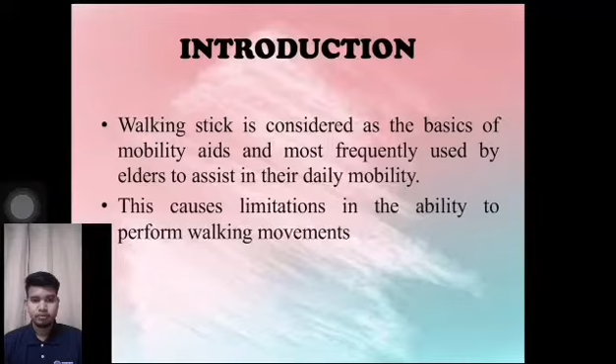For problem statement, we have three. Number one, different environments have limited features that can be used with the walking stick. For example, in Malaysia we face humid and hot weather, so for people using a walking stick, it is inconvenient for them to bring an umbrella everywhere. It can be a burden due to heavy weight.

For the second one, the user may not be able to maximize the use of the walking stick, especially for those who are disabled, because some features in the walking stick have complicated functions.

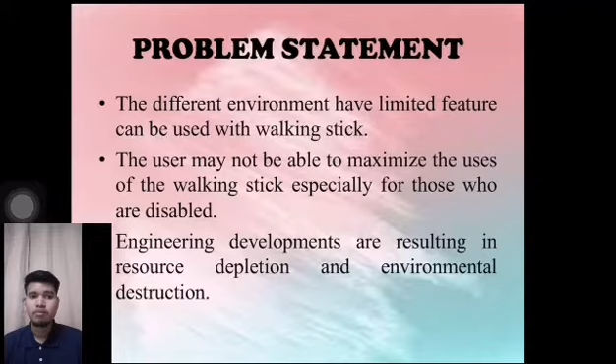For the third one, engineering development is resulting in resource depletion and environmental destruction. This is because nowadays a major issue has risen about environmental safety.

For our objectives, the first one is to innovate the current walking stick with a unique design. We want to design a walking stick that has multi-function usage.

For the second one, to determine the function of the walking stick while working properly, so the user can use the product efficiently and effectively with the multi-function product.

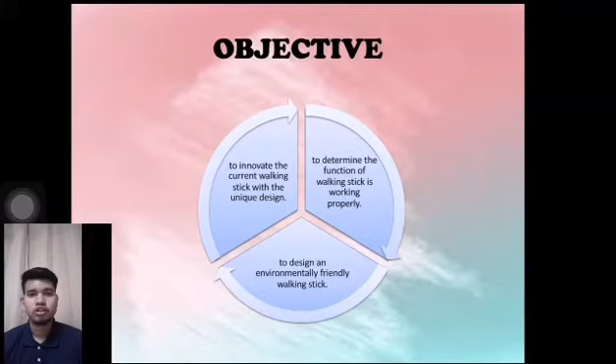The third is to design an environmentally friendly walking stick, so we want to avoid the destruction of the environment which is the current issue.

Assalamualaikum warahmatullahi wabarakatuh. I am Nurin Safia binti Rusli and I am going to explain the literature review and methodology. As we know, external support is needed to increase sensory input and psychological support in physical disabilities while walking. The elderly start using a walking stick because of balance, postural disorders, and to prevent falling.

A walking stick is the most preferred walking aid because it is easy to use and is accepted by society. However, there is a common problem in that walking sticks are not ergonomically designed. Usually, walking sticks designed and developed by medical device manufacturers are not suitable for individuals, but are manufactured considering average senior citizen anthropometric dimensions.

These types of walking sticks are mainly non-adjustable, heavy, and hard to use on any occasion. They also cannot be fully folded. Due to big sizes, these existing products are inconvenient to use in crowded areas and also hard to store. Generally, walking sticks are often built in a traditional way and are not designed considering ergonomic principles.

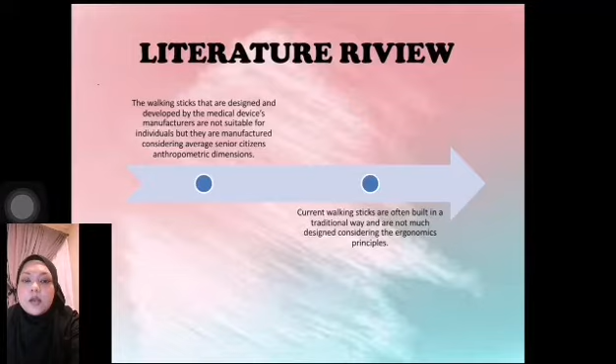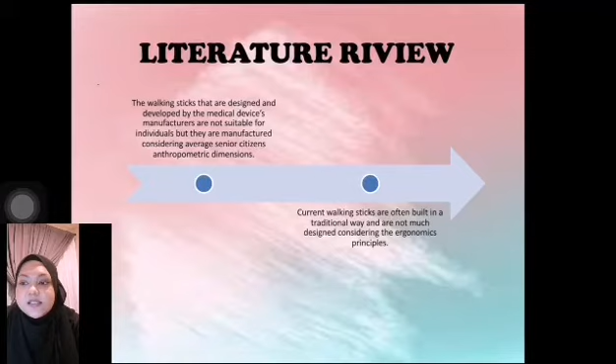After having all the particulars and standards, the morphological chart is obtained using these steps. The first step is to put the choice rules into a table from Task 1 overview since it mirrors the customer request towards the item.

Next, list down a number of plans at the top to allude to. Put the idea parts into the outline to choose later on. Then we have to consolidate all the ideas or thoughts for the item, and the last step is the screening and scoring process.

The screening process is where we evaluate and reduce the number of generated concepts that were taken into account to satisfy the user's needs, by comparing relative advantages and disadvantages of each generated concept and selecting one or more concepts at the end.

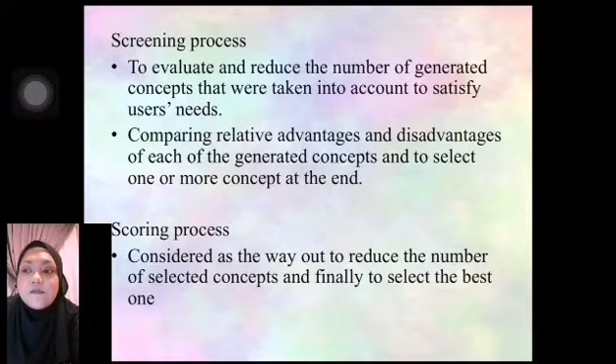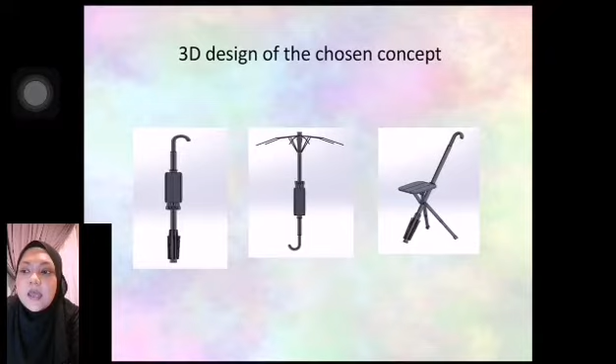For the scoring process, we use it as the way to reduce the number of selected concepts and finally select the best one. After screening and scoring, we obtain the one best concept, and the 3D design of the chosen concept is this.

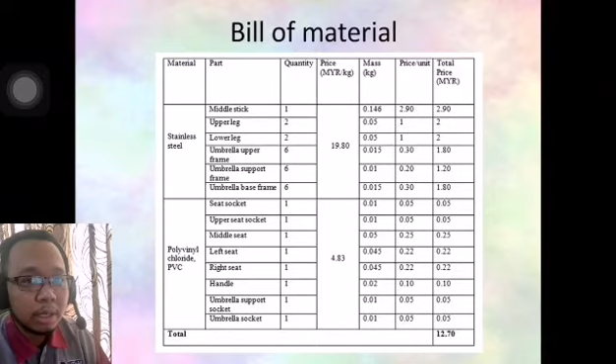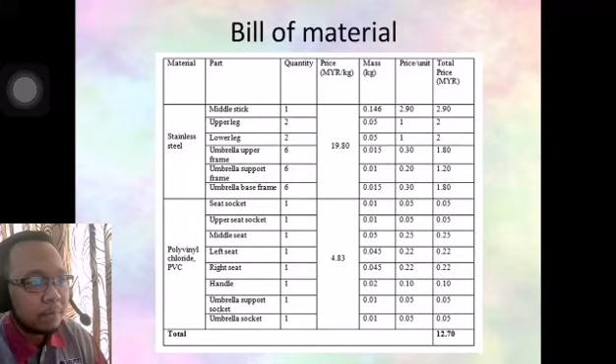For the bill of material, our main materials are stainless steel and PVC. During the project, the price per kg of stainless steel is 19 ringgit 80 cents and PVC is 4 ringgit 83 cents. After multiplying the price, mass, and unit of the part, we get a total price of 12 ringgit 70 cents.

Now for the manufacturing process, we have the middle stick part. The appropriate process for the middle stick is seamless extrusion because of the shape of the middle stick.

With seamless extrusion, we can get a seamless hollow pipe shape. After that, we have middle seat, left seat, and right seat. The appropriate process for this part is injection molding, and then fabrication to get a more refined finishing product. Same with the upper seat socket, umbrella socket, seat socket, and handle.

After that, we have upper leg and lower leg. These two products are made of wrought stainless steel. So the appropriate process is extrusion and then fabrication to get a more refined finishing product.

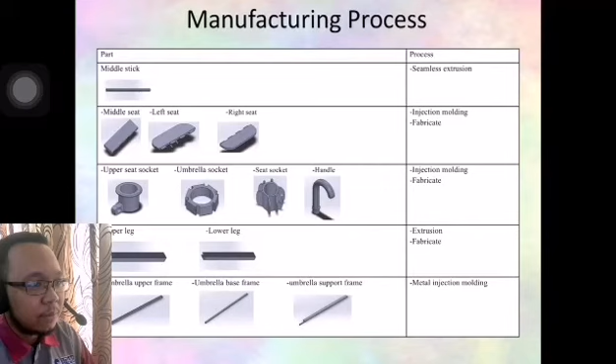Finally, we have umbrella upper frame, umbrella base frame, and umbrella support frame. These three products have a complex shape, so the best process for these three parts is to use metal injection molding to get the complex shapes of the product. That's all from me. Thank you.

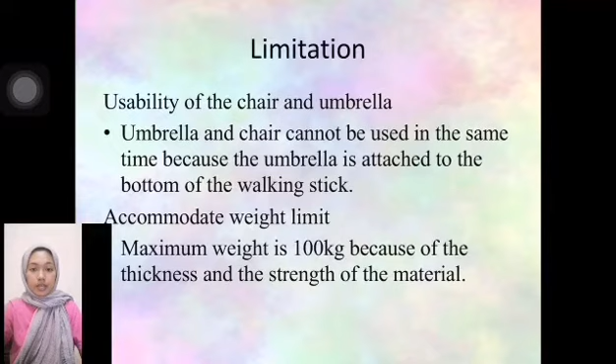Next, I will explain the challenges faced while completing the project. First, we had trouble distributing the questionnaire because this product is specifically made for the elderly and those suffering from walking disability. Most of them do not use smartphones to answer the questionnaire in Google Form, so we had to meet them personally.

Next, the unstable and limited coverage accessibility led to difficulty in searching for information and completing the project. Lastly, students had trouble and limited access to related sources because of the pandemic, as all libraries were closed, which limited our ability to find information about the walking stick. Next, I will explain the estimated cost for one walking stick.

The raw material cost is RM12.70 as shown in the bill of materials. The manufacturing cost is RM50. It is quite expensive because it includes the cost to make the stick, seat and umbrella, and the cost to connect all parts into one walking stick with chair.

The transportation cost is RM5 for one walking stick, to deliver the item to the buyer. The total estimated cost, which is RM67.70, is for the direct buyer. The price will increase according to market value.

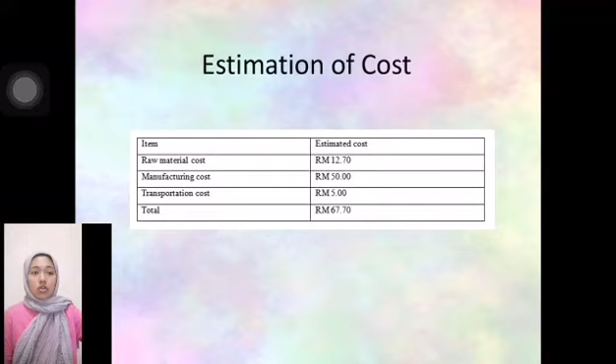I will present part of the discussion. The walking stick chair with umbrella is an idea derived from an existing product, improved based on customer feedback. The umbrella is another function provided at the walking stick, which is the new idea.

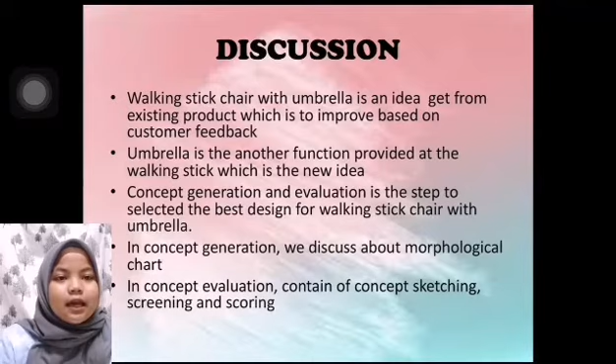Concept generation and concept evaluation are the steps to select the best design for the walking stick chair with umbrella. In concept generation, we discuss the morphological chart. In concept evaluation, we cover concept sketching, screening, and scoring. Firstly, let's look at concept generation.

This figure shows the morphological chart. At that point, we arrange our discoveries or examination into the diagram. This diagram comprises our choice of measures and 5 choices of design plans. This outline is essentially founded on functional examination of our item.

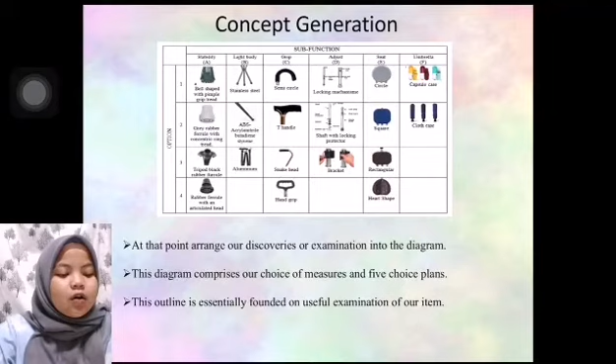Next is concept evaluation. There are 5 concepts obtained from the morphological chart. Concept 1 has a bell shape with pimple grip tread, body of stainless steel, semi-circle hand grip, locking mechanism for adjustment, circle seat, and capsule case for umbrella.

Concept 2 has a tripod black rubber ferrule, body of ABS, hand grip shape, bracket for adjustment, rectangular shape, and cloth case for umbrella.

Concept 3 has a grey rubber ferrule with concentric ring tread, body of ABS, T-handle shape, locking mechanism for adjustment, rectangular shape, and cloth case for umbrella.

Concept 4 has a rubber ferrule with an articulated head, body of aluminium, semi-circle shape, bracket for adjustment, rectangular shape, and cloth case for umbrella. And lastly, concept 5.

Concept 5 has a bell shape with pimple grip tread, body of stainless steel, T-handle shape, bracket for adjustment, rectangular shape, and cloth case for umbrella.

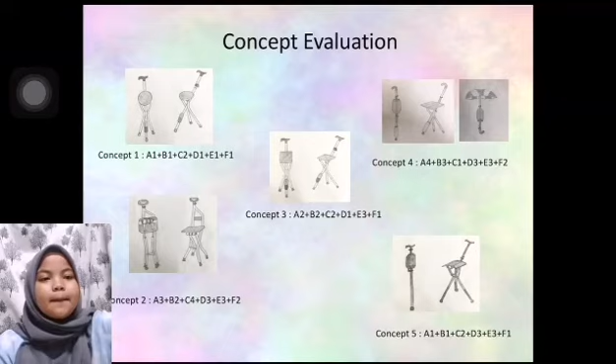Based on customer needs, which is translated into the morphological chart, 5 concepts were decided for the design of the walking stick chair with umbrella. Selection criteria were selected from the customer, obtained from the questionnaire we built to know what the customer needs from our product.

Concept 6 is our datum, shown in the concept screening table. As a result, there are 3 concepts selected from the screening method: concept 2, concept 4, and concept 5. Concept 5 has the highest ranking other than the datum because most criteria are better than or equal to the datum. Concept 4 and concept 2 have the same net score because some criteria are better or worse than the datum.

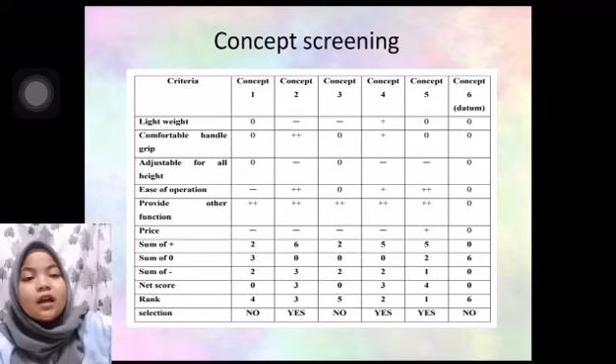After the concept screening, we needed to score all 3 selected concepts. Concept scoring uses a numerical score on a simple scale relative to a benchmark. The weight percentage is obtained from the house of quality, based on the importance of customer needs.

Although we changed the value a little, because we looked at the major criteria customers need from our product, the rating of each selection criterion is based on the previous method, which is concept screening. The two figures show the concept scoring. Concept 4 is selected from the scoring method based on the rating of each selection criterion from the previous concept screening method.

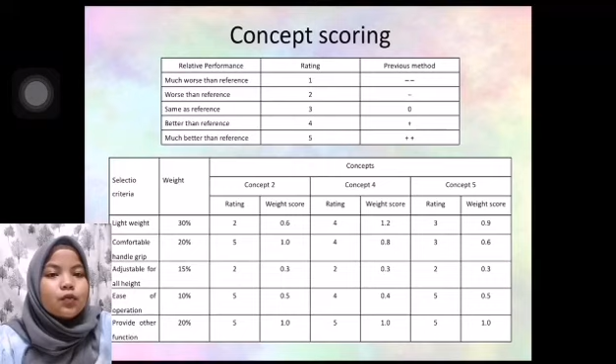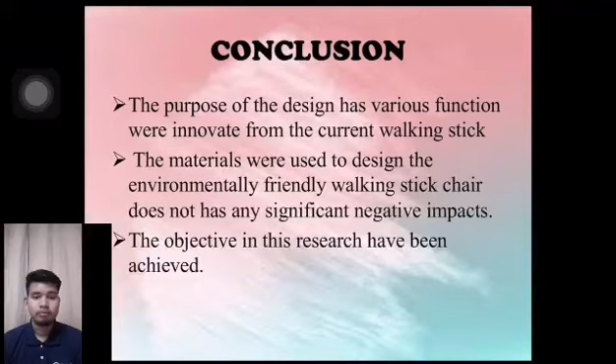For the conclusion, the purpose of the design with various functions was innovated from the current walking stick. The materials used to design the environmentally friendly walking stick chair do not have significant negative impact on the environment. So the objective of this research has been achieved. Thank you.